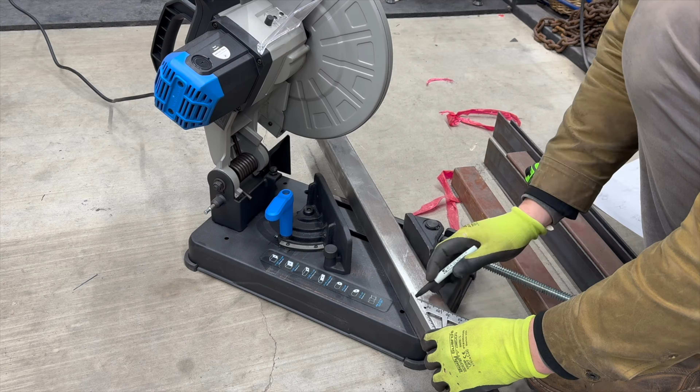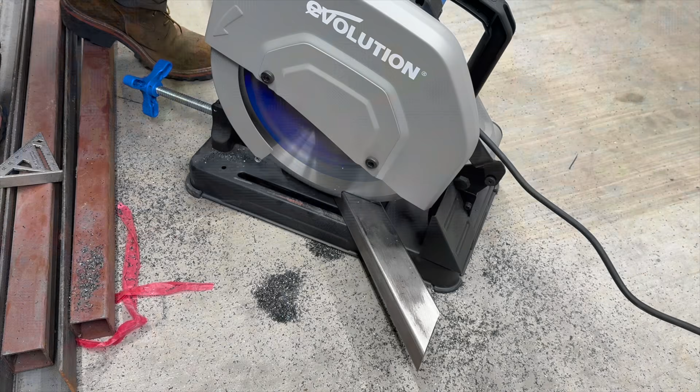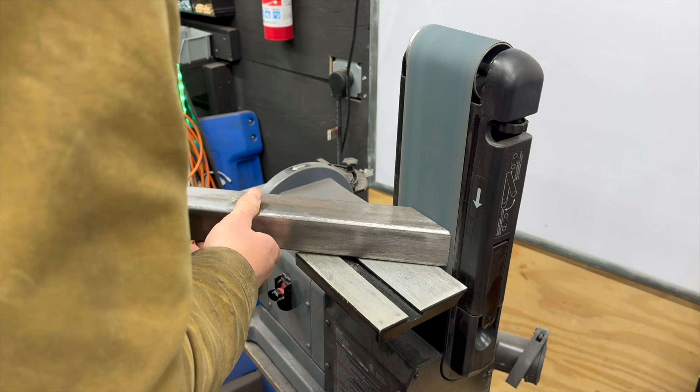4-inch square tubing. So according to my plans, the base structure is going to be 27 inches and 16.5 inches wide. Tacks coming up.

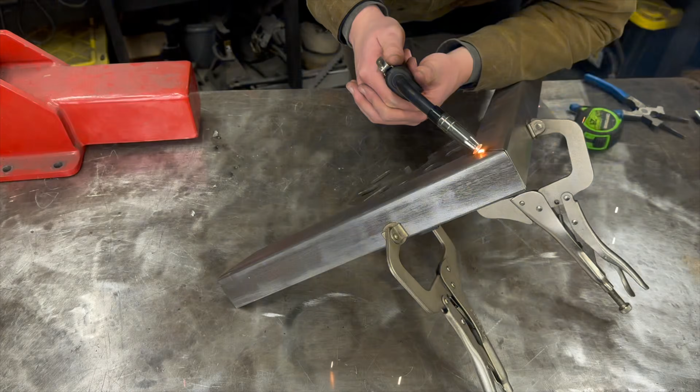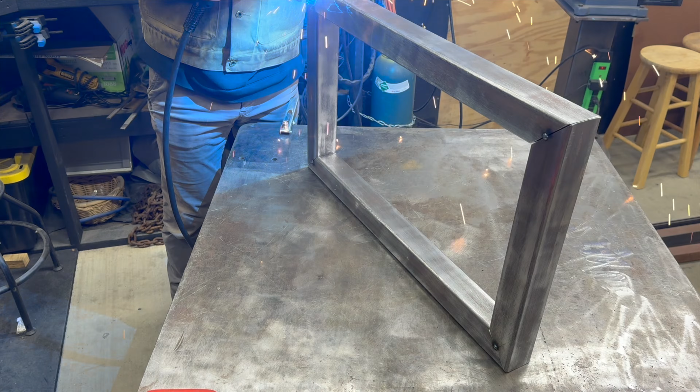One down. It's the top structure, which is going to be 21 inches and 11.5 inches. I'm going to go ahead and tack those square, and then we'll cut the legs. Let's roll. 1 clamp, 2 clamps.

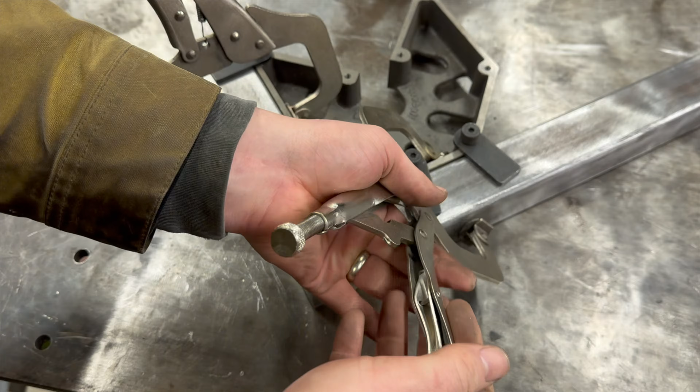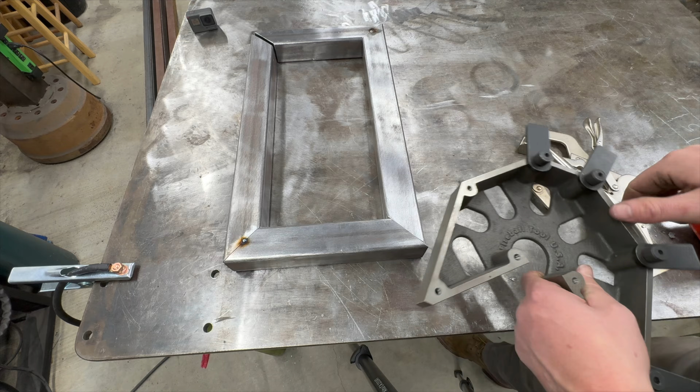So I have my 2 L's tacked up, and I was going to use my fireball square to finish out the rectangle. However, this fireball square does not fit in between the 2 sides in either direction. I did notice that you have this outside angle that you can use. Bada bing, bada boom. We can still clamp 2 on either side, but there's still room to tack it, so we're all good.

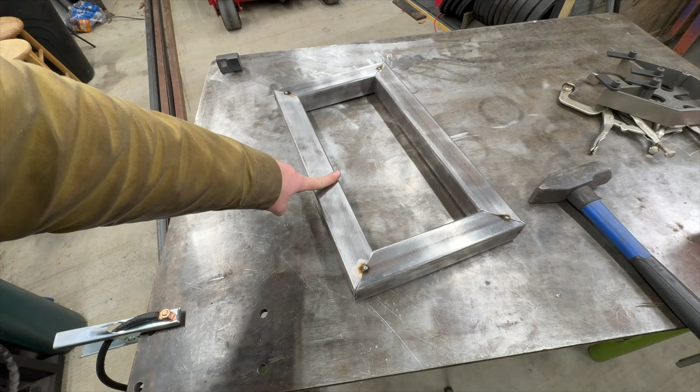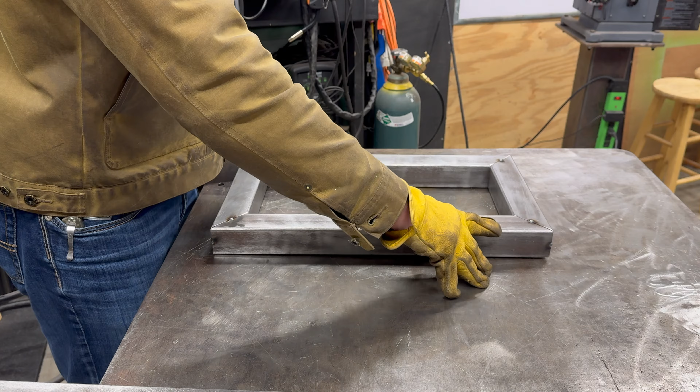Welder base, cart base. So when I was moving these around, I noticed that this smaller one's pretty wobbly on the table. Let's get the grinder and grind those flat real quick. Yeah, it's still really bad. I overcompensated.

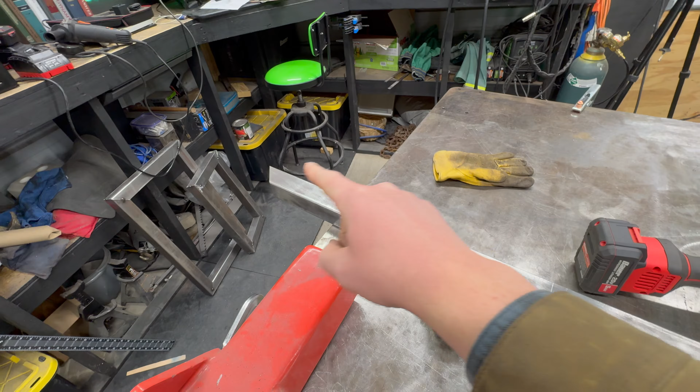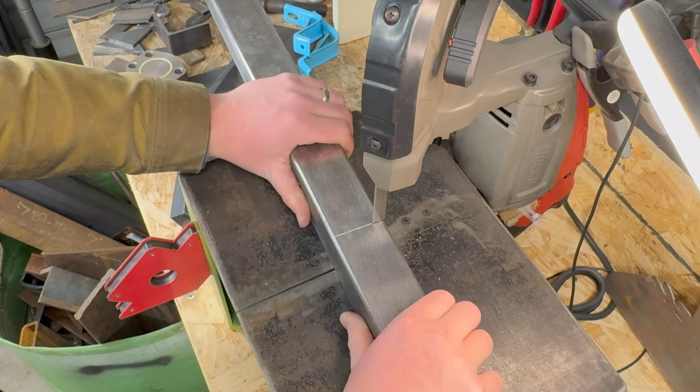So now we have the end with the 45. This is the remaining stock from what I cut up for those rectangles. We need to cut an additional 45 on this side and then cut it in half for each leg, as seen here. Boom! So the angle for my leg to go up is only 7 degrees, not much. And to make my jut over equal, so there's not a lip at that slot that I cut, it needs to be 3.5 degrees off each side.

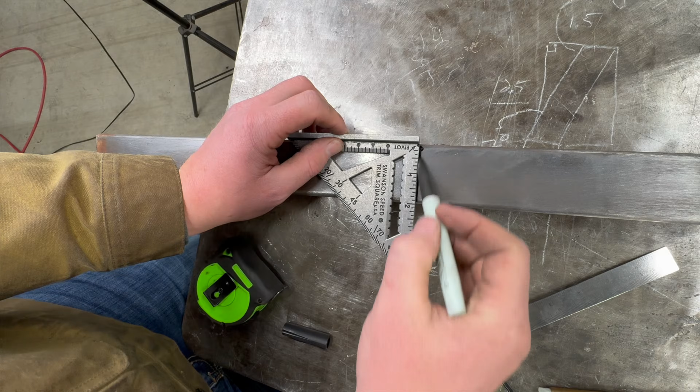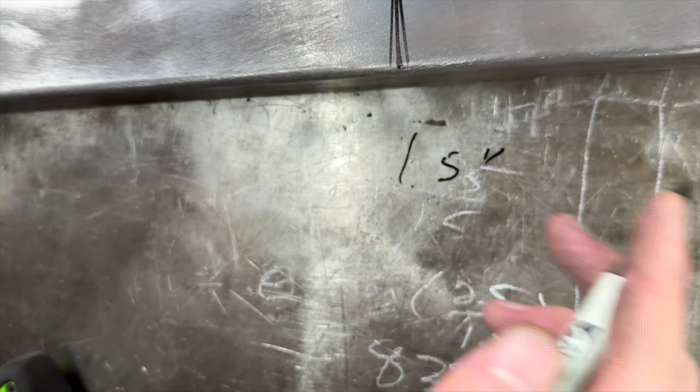So in theory, if I cut out this wedge right here, this piece is going to bend over 1.5 inches. I needed it to come over at that 12.5 inches of length from the center. Let's cut this out and see if that's how it shakes out.

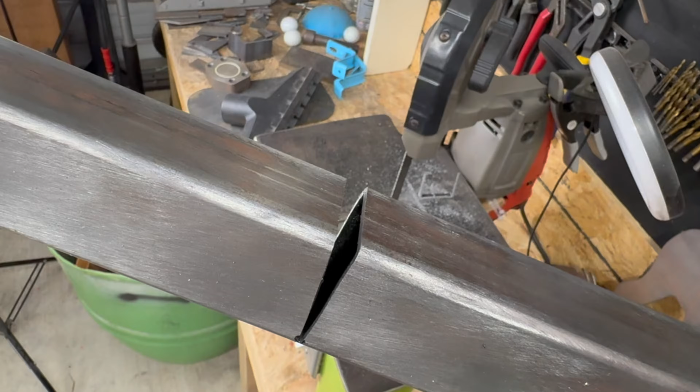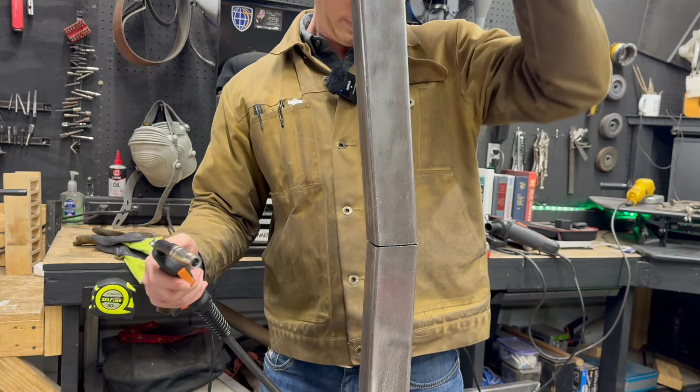What a nice wedge. I really like this wedge. Let's put it in the vise and bend it over. Oh, look at that fit up. It's like I know what I'm talking about. Oh yeah. So I went and wedged the other one out off camera. I'm going to push this one to be straight with that one.

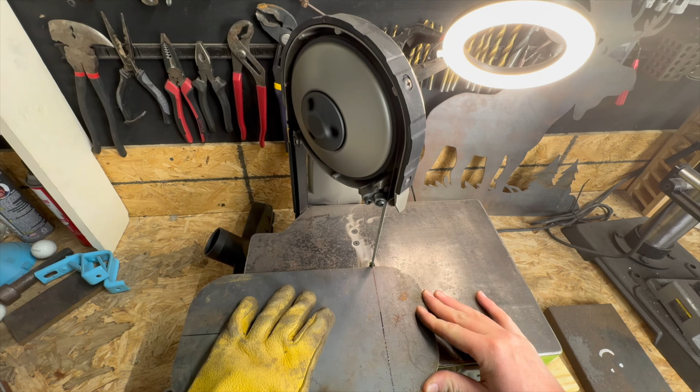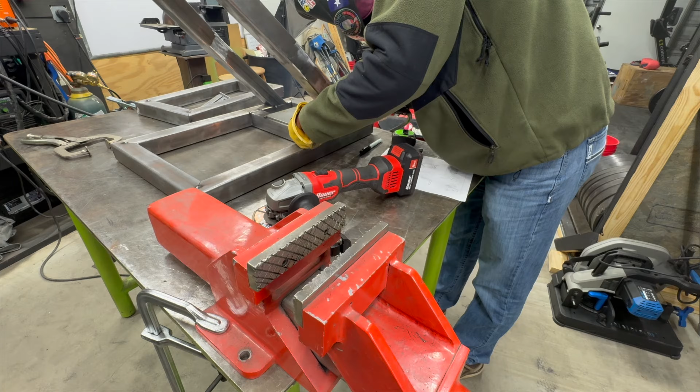Now, since we've got the legs on, we're gonna go ahead and cut some slots in the top in order to put the top structure that the welder is gonna sit on top of here. I think I'm gonna put it at about a 5-degree angle to allow for the control knobs on my welder to be pointing up, because this is only gonna be sitting about 3 feet off the ground.

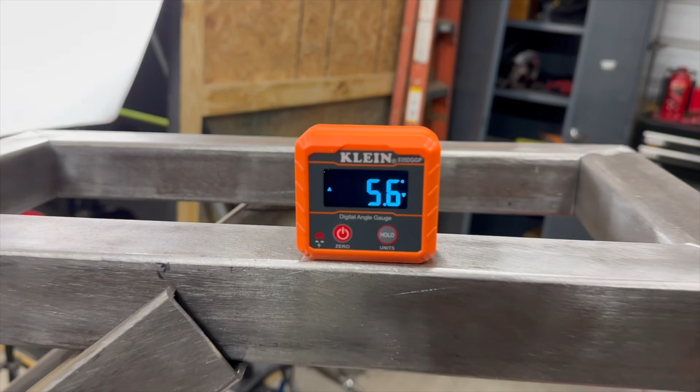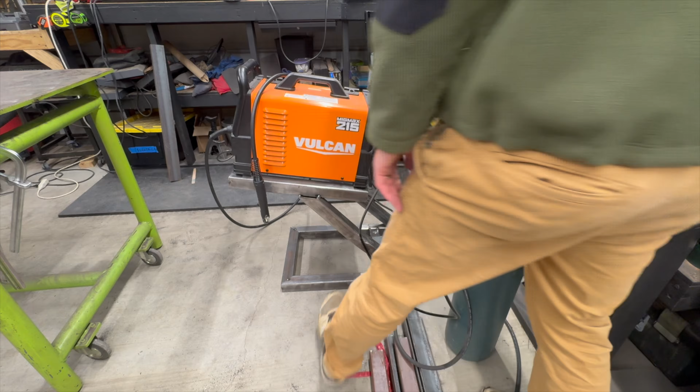So I got that top structure tacked up. So let's go ahead and put my welder, the MIG Max 215 from Harbor Freight, on top and see if it looks how I want it to. Hot diggity, that looks good.

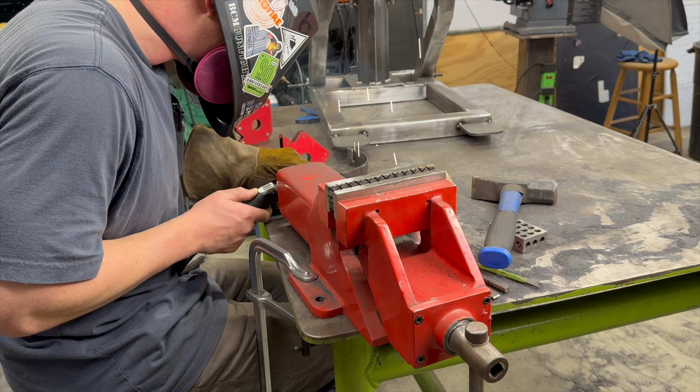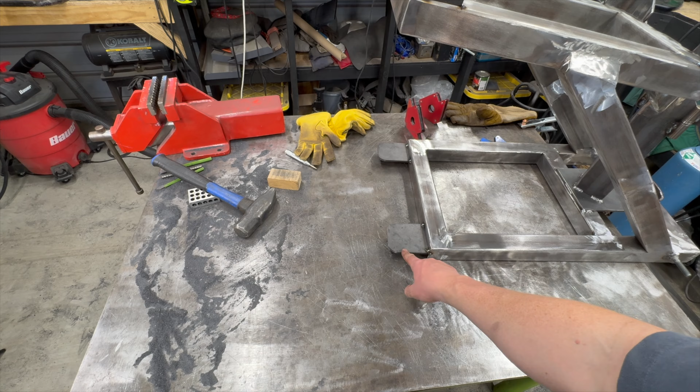So these casters go under these 2 feet right here. I need to go ahead and make some braces. I'm gonna go from the top of the square tube down a distance here so these stay level to each other. Otherwise they won't swivel correctly.